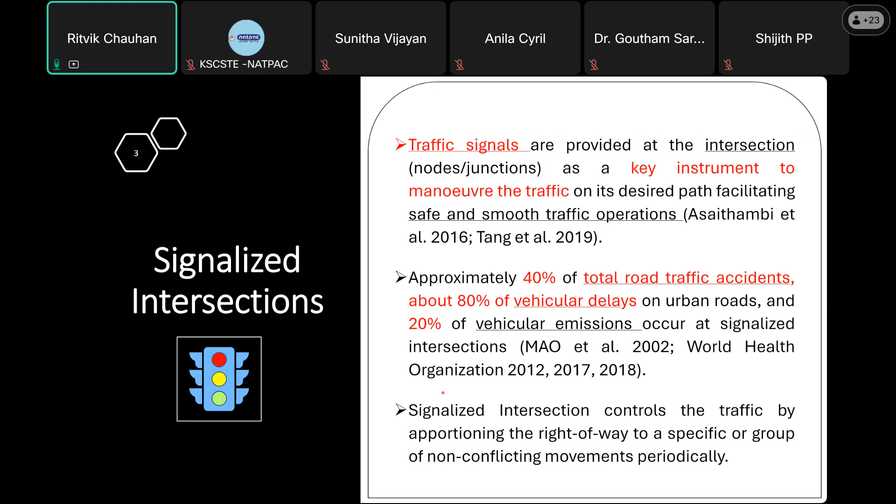However, globally and even in Indian records, a significant number of road accidents have been observed. But why is it so? Even though road control parameters are observed, the main reasons have been found to be high speeding, red light violations, and mostly rear end collisions occurring because of vehicles stationary at the signalized intersection. We generally observe 3 phases at signalized intersections, and their functions are pretty much clear.

Red phase, the vehicle should stop. Green phase, the vehicle has the right of way, or that specific approach has the right of way and is allowed to go. And the amber phase, that succeeds the green phase and precedes the red phase, is to provide a warning to drivers that an imminent red phase is coming. Please decelerate and achieve a stop, or if you are already at the stop line, you may continue and clear away from the intersection.

However, in India, it is generally observed that to avoid additional delay, drivers often tend to cross even during the amber phase. As observed in most developed countries, the general rule followed is go at green - meaning if it is green, then only the drivers go. But over here, we observe stop at red - meaning as long as it is red, only then do drivers tend to stop. If it is not red, drivers take that as permission to cross the road.

Because of this, even during the amber phase, drivers continue to cross the stop line until it turns red. What are the results of this?

This creates a scenario where, even as we can see, if the red light has just turned on, whatever vehicle had crossed the stop line is occupying the intersection width. Because of this, the next approach that is supposed to receive the green phase is not able to traverse through the intersection. So coming back to our amber phase, it serves as a buffer zone.

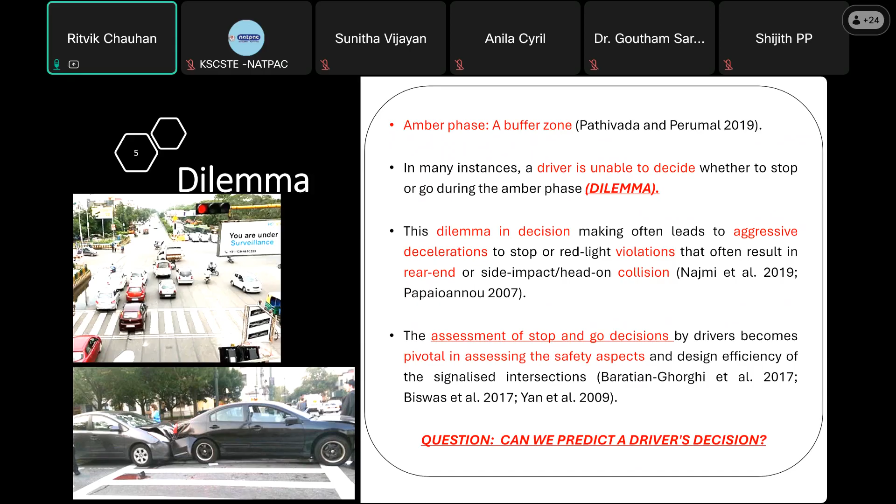So the dilemma zone mainly occurs in the upstream region. Let's say at this signalized intersection, this red line I'm drawing is the stop line, and this is the direction of the traffic. So the dilemma zone will potentially occur in the upstream zone. Similarly, for the opposite stream, it can be on the other side.

If we are able to accurately identify this potential dilemma zone that we are observing, we can provide some means of indication to the drivers that this is a potential dilemma zone. If there is an amber phase, it's better that you decelerate rather than ending up in harsh or aggressive deceleration conditions, or red light violation conditions.

Over the studies, it was observed in 1960 that there are two types of dilemma zone.

The first type of dilemma zone is based on vehicle characteristics, or physical and operational characteristics. That means with the speed the vehicle is moving at, it will neither be able to stop before the stop line, nor will it be able to completely cross the intersection safely in the given amount of time. So if it can't stop before the stop line, nor cross the intersection, it will end up in the region of the intersection. That's what we call type 1 dilemma zone.

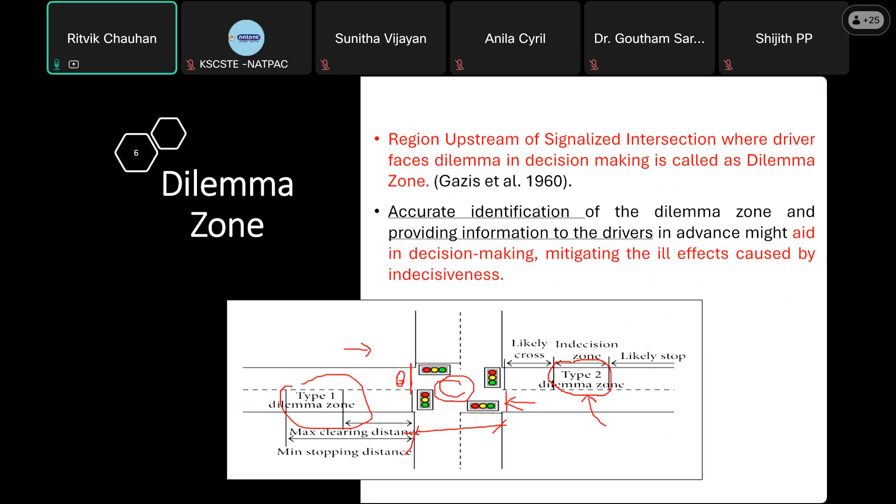So how do we measure type 1 dilemma? Since it's based on vehicle characteristics, we consider that if a vehicle is arriving from this point, it needs a certain point of clearance. That means the vehicle should cross its particular distance to the stop line along with its width, such that not just the front part but even the rear bumper should clear the intersection. So whether the vehicle has potential clearance distance within the available time before red turns on, or else from its position, if it starts decelerating at a normal rate, will it be able to stop before the stop line or not—that's what we see.

So whether it will be able to clear and cross safely, or whether it will be able to stop before the stop line—if neither is able to clear nor able to stop, that region we call the dilemma zone. There is another option: if the driver has an opportunity to either safely cross the intersection or safely stop, we call that the option zone.

However, in India, among multiple studies, it has been found that the option zone rarely occurs. But if we want to provide an option zone, it's very easy. The theory states that we need to calculate the stopping distance, that is braking distance, and the crossing distance, in which width of the intersection, length of the vehicle, time available before red starts, and reaction time are considered.

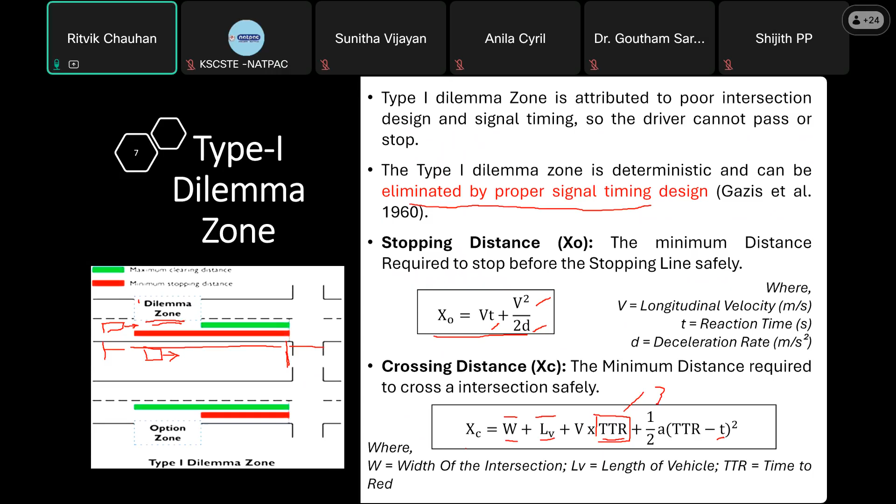So that is the limit of type 1 dilemma zone. That means type 1 dilemma zone cannot be properly eliminated in Indian conditions. If it needs to be eliminated, it has to be followed by proper traffic rule adherence by society. Second is type 2 dilemma zone.

Type 2 dilemma zone, since it's a decision of the driver, considers multiple parameters such as what is the vehicle speed at the start of the amber phase, how far is the vehicle from the stop line, and what type of vehicle the driver is driving. These are the three main parameters used in earlier studies and most studies. However, multiple studies have found that in addition to these three, there are many more significant parameters related to the vehicle.

Vehicle characteristics, signal operation characteristics, field geometry or environmental characteristics, driver parameters, and traffic conditions - studies have been carried out for different traffic conditions using different methods. Since these many parameters have been found significant, that brings a probabilistic nature to the type 2 dilemma zone. So where type 1 was static, type 2 is stated to be dynamic or probabilistic in nature.

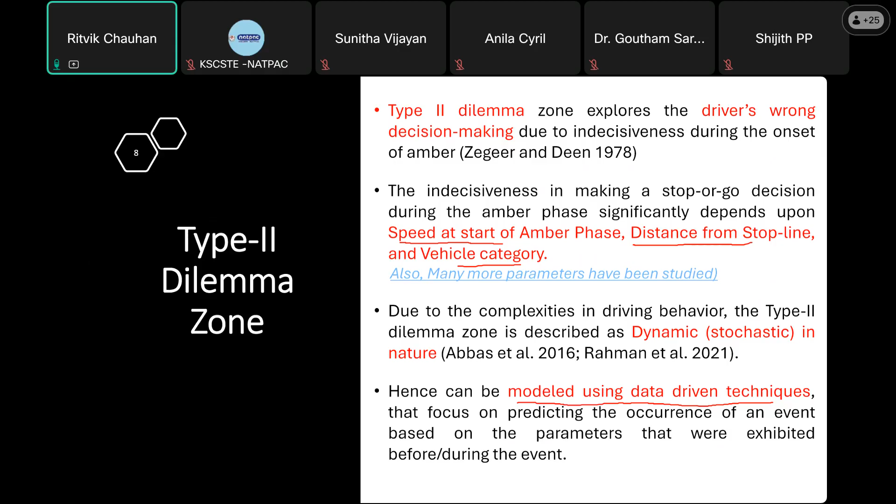Since it is probabilistic, studies have been carried out on data-driven techniques to calculate the potential probability of a vehicle opting to stop or cross considering its different parameters. Since the decision is binary, whether the vehicle should cross or stop, binary logistic regression has most widely been used, where we consider multiple parameters as independent parameters, and the dependent parameter is the decision to stop or cross.

Based on this utility equation, we can find out the probability of passing or probability of stopping. It depends - if you are modeling for crossing, you get P of passing based on the equation, and 1 minus probability of passing gives you probability of stopping.

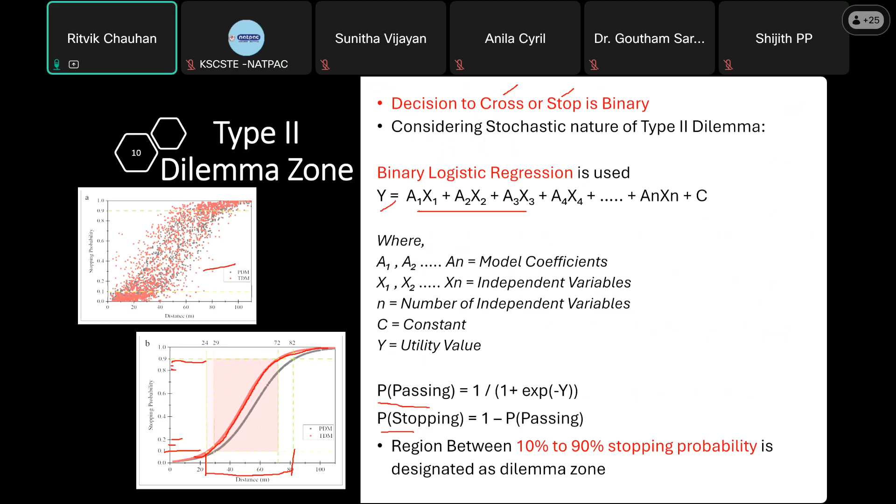Whatever this region corresponds to in distance is said to be the dilemma zone, where indecision or delay in decision making occurs. Subsequently, as we saw for type 1 dilemma zone, considering an average speed or the speed limit of the intersection, the region where a vehicle arriving will not be able to cross or stop will be under dilemma. This is the visualization.

Some studies have also gone with temporal dilemma zone - that means between 2.5 seconds to 5.5 seconds before time to red is where the dilemma in decision making is often observed. But if we want to calculate temporal based dilemma zone, there should be an indication to the driver of the time limit or green time available.

We have display counters, countdown timers at signalized intersections. If those are available, based on values from them, it has been found that 2.5 seconds to 5.5 seconds is an acceptable region where the dilemma will occur.

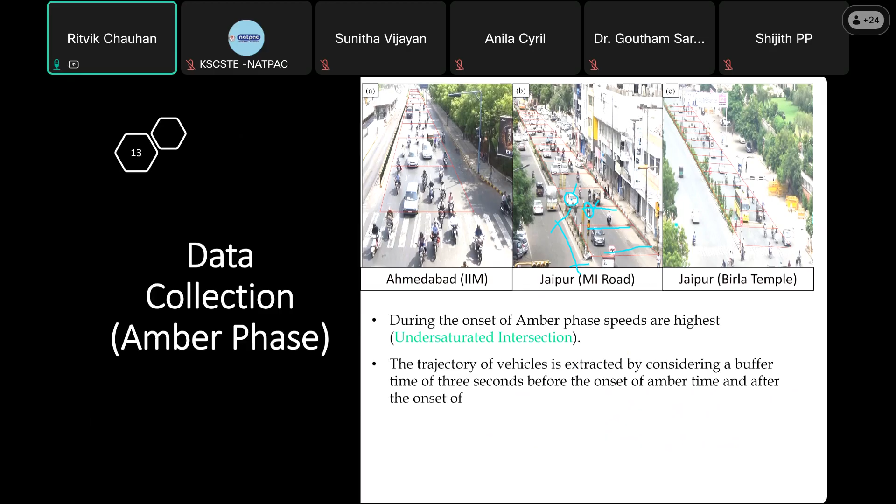These are the main parameters found significant from earlier studies. If you have the study location data, you can consider additional parameters, such as whether the type of intersection plays a significant role as a categorical variable, or whether the approach road width or number of lanes is significant.

Another consideration is the cycle length - if drivers are acquainted with the signal intersection, they know the signal cycle length and the delay it might cause. So whether the signal cycle, amber duration, or green duration is significant are multiple parameters you can add to your analysis for type 2 dilemma zone.

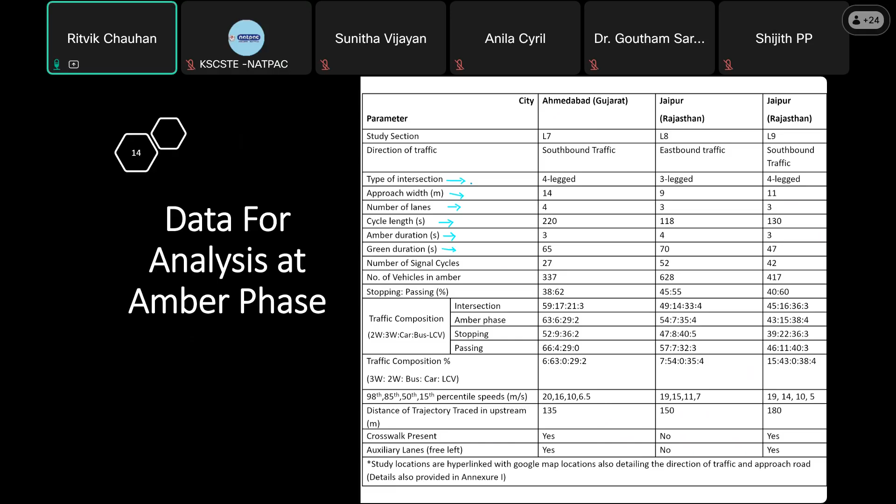In our study, we considered multiple parameters and developed two models. A simple model that only considered distance from stop line, longitudinal speed, vehicle type, and the lane number in which the vehicle was moving - though vehicle type is not specified in this table.

The second model considered all the parameters shown in this table, just to check whether considering more parameters yields better results. Of course, more data-driven techniques will yield better results, but that depends on whether you can acquire this data. Trajectory data proves its advantage here, since you can extract all these parameters.

This includes the potential location of the vehicle, its lateral location, which lane it's moving in, whether it's undergoing lateral movement, the signal cycle length, whether an auxiliary lane was present, and the acceleration of the vehicle.

Based on that, we considered a simple model using only 4 parameters: speed, distance, vehicle type, and lane number. On external validation using an additional study location's data, we found an accuracy of 70%. There have been other studies also that have achieved some accuracy.

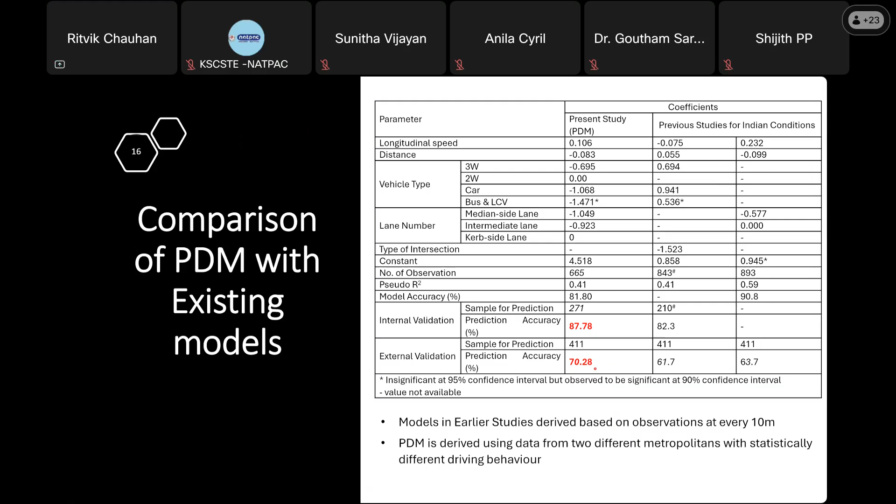Currently, studies in India have achieved 70.28% accuracy in predicting whether the driver will stop or not. If we add additional parameters - all the parameters - we get accuracy of 79 or almost 80% on external validation. But if the model is used for the same intersection it was developed on, we get 90% accuracy, which is an acceptable value.

With that, we are sure that with 90% accuracy, we can predict whether the driver will stop or go.

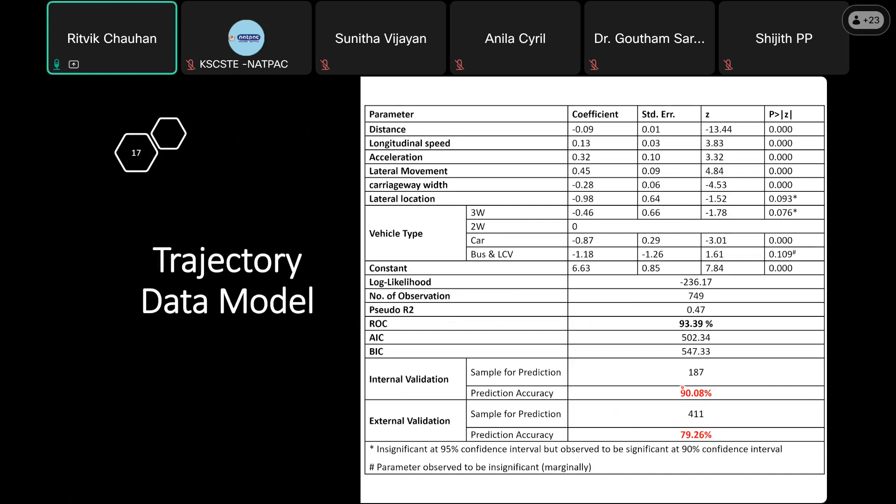Where the model helps is that regression-based models, since they give us coefficients and parameters, help us in evaluating different policies - what if we increase the speed limit, or what if the overall average speed of traffic increases, or what if the vehicle is found to be accelerating at the intersection?

If there's lateral movement - let's say motorized two-wheelers undergo more lateral movement, whether vehicles are shifting towards the median or laterally shifting on the road, or if the vehicle size is increasing - based on that, how does the dilemma zone shift away from or near the signalized intersection?

This can be studied if you have a regression-based equation, and this helps us in pinpointing the accurate location where the dilemma might occur to the driver at a particular intersection.

Based on that, if you have type 1 or type 2 dilemma zone marked, such markings are provided at intersections to guide the driver that this is a dilemma zone, please make your decision before you cross this region. This might be the safe limit, upper or lower boundary, where you might be able to safely slow down or cross. If you're after this zone, cross as soon as it turns amber. If you're before this line, please stop. And if you're in this region, the most desired option should be to stop so you can achieve a safer crossing rather than a red light violation.

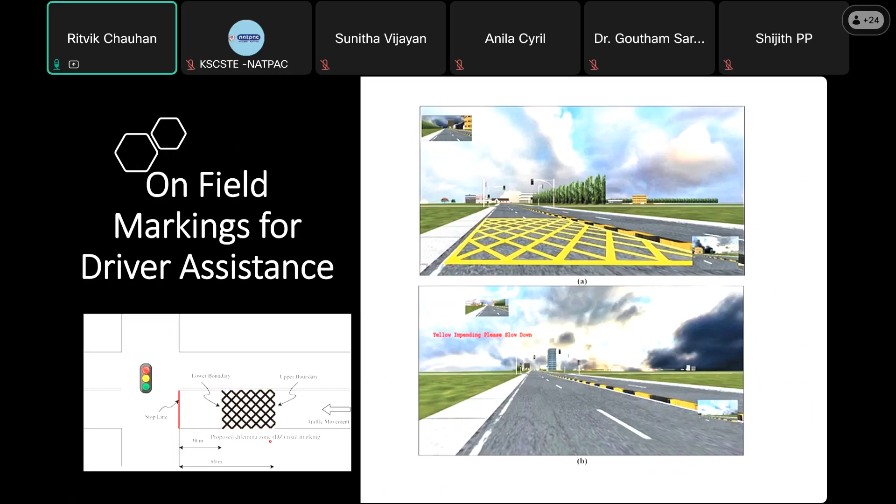Now the next aspect is whether, even after providing these means, the driver ends up making a wrong decision. What might be the potential options? First, he can decelerate very hard. If he decelerates very hard, he ends up with a rear end collision. And because of that collision, how do we measure that?

So we have different proactive safety assessments. If we rely on accident data, the problem is: at one location, what was the potential reason for accidents, and were the number of accidents sufficient to justify safety improvement measures properly - it's difficult. Hence in this present study, we went with proactive safety assessment.

We used surrogate measures to detect the conflicts, and based on the conflict we found out what are the hotspots. We tried to model the rear end conflicts as to what is the probability that, with given parameters, a particular vehicle will end up in a rear end conflict. And if we just change simple traffic operation parameters, can we reduce the probability of rear end conflict for a particular vehicle? So what is a conflict? I'll briefly go through this.

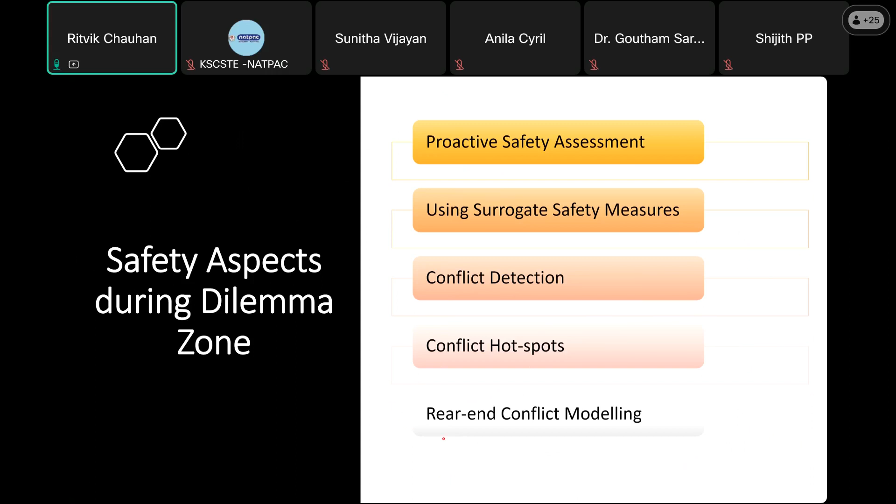If two vehicles are moving, provided that the follower is traveling at higher speed than the leader, then at a certain point there is a potential that they will occur in a rear end conflict. But if during that moment the driver perceives it and decelerates, changing the trajectory, then the conflict point is avoided. So this surrogate safety measure considers that a potential collision will occur. Another theory is that every accident was a conflict, but every conflict is not an accident. So if you can remove a conflict, you can entirely remove an accident. That is the basic essence of what we go with in surrogate safety assessment.

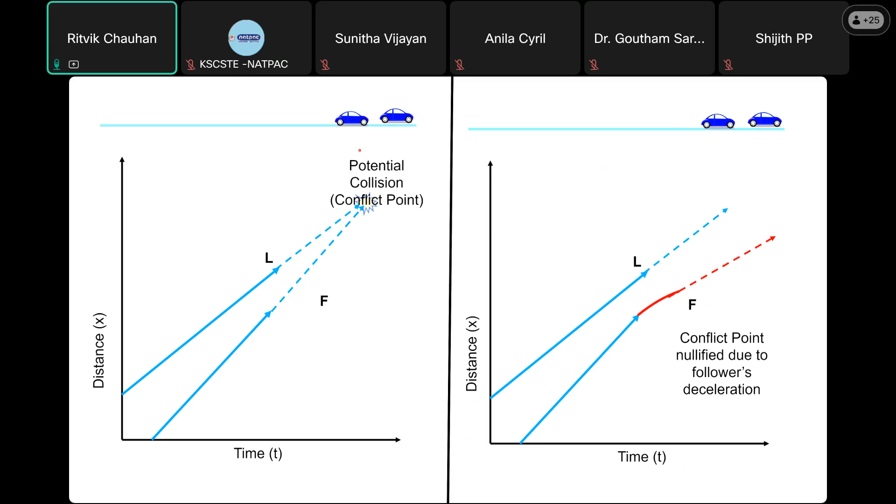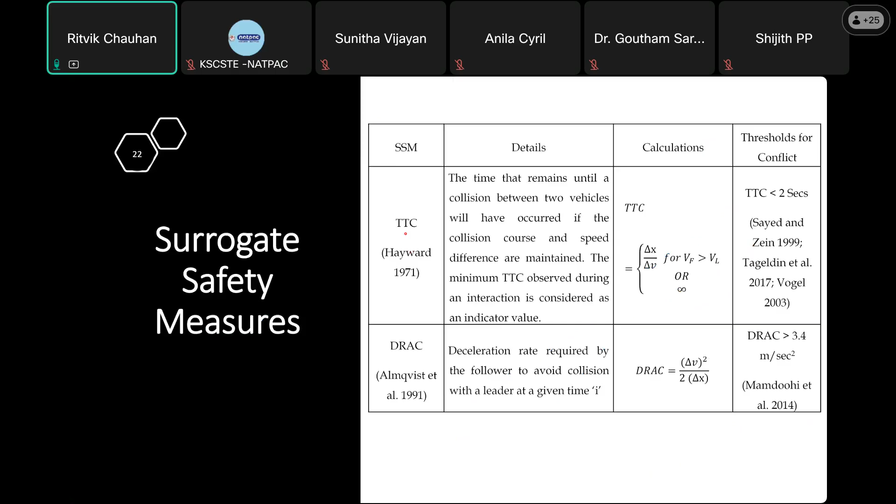We use two surrogate safety measures: time to collision and deceleration rate to avoid collision. Basically, at what rate should the vehicle decelerate to avoid the collision? And if the vehicle continues to move at the same speed, after how much time will it collide with another vehicle? Based on that, we found out the potential leader, follower, or vehicles interacting with each other, their relative speed, the delta x and delta v, and based on that, whether they were in conflict or not.

Since these bigger vehicles are either more cautious, or require more deceleration, or have lower maneuverability, their decision might be made much earlier before the signal stop line. Whereas two-wheelers, because of their high maneuverability and advantage due to road size, were observed to be more aggressive and decelerate at a higher rate near the stop line, because of which the potential of rear-end conflicts was significantly higher near the curb side, where two-wheeler vehicles were found to be more.

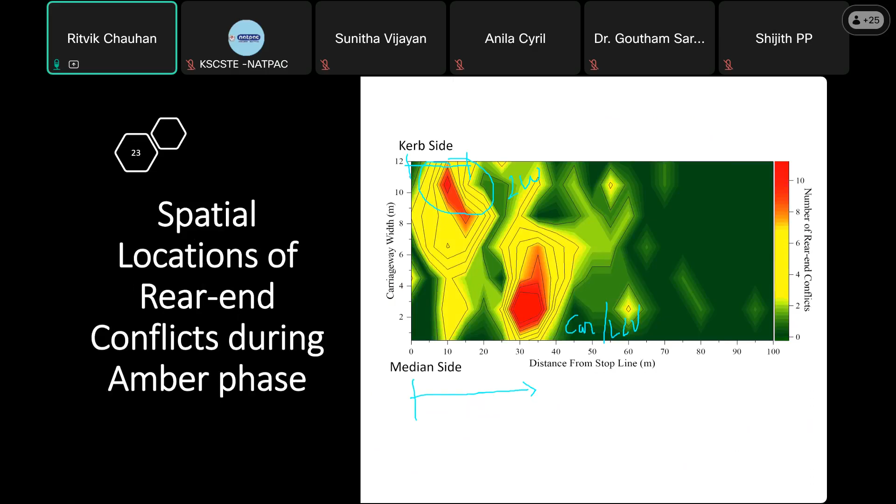Now for that conflict, what will be the probability, and what will be the number of rear-end conflicts? If we can predict, based on operating conditions, the number of rear-end conflicts, it has practical applications. We can determine the potential hotspots for our current operation policy, and whether a change in policy results in a change in the number of conflicts. Rear-end conflict probability provides advanced driver decision-making assistance, and it works on a microscopic level.

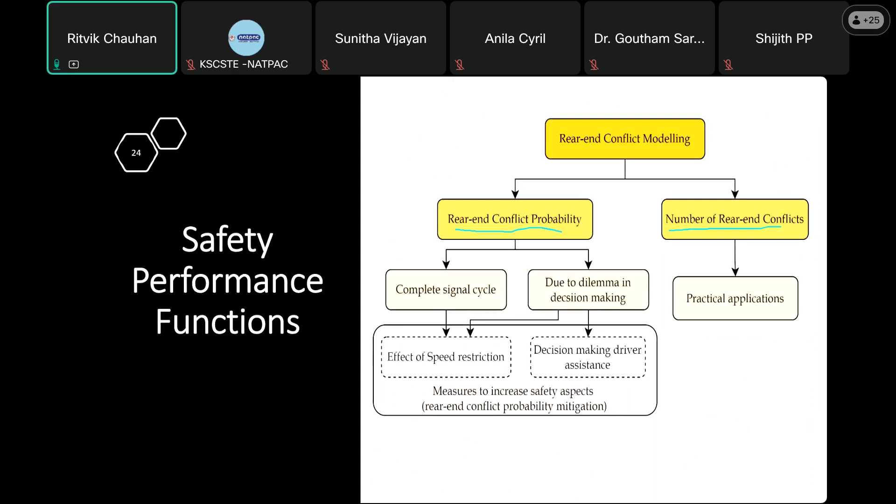Since our decision is binary, to stop or to pass, the conflict is also a binary variable based on the different independent parameters we considered. Whether it was a conflict or not between two vehicle classes can also be binary, and hence we also use binary logistic regression. Now in this, we use multiple parameters.

We use the longitudinal speed of the leading vehicle and the following vehicle, what was the follower location, and was there any lateral overlap between the two vehicles? Let's say this is one vehicle and this is another vehicle - a particular region would be the lateral overlap. And because we don't have lane discipline, this vehicle can deviate to the right side and also overtake. Hence we also consider what was the lateral overlap and whether it has significance.

What was the follower's lateral speed while moving? If it is moving laterally from the start, that means it can easily overtake, or it can negate the lateral overlap. What was the leading vehicle class and follower vehicle class? In addition, since the data was already extracted, we had the leader's decision to pass, and what was the leader and follower's decision. Based on that, using different surrogate safety measures and at different thresholds, we tried to model what will be the conflict probability.

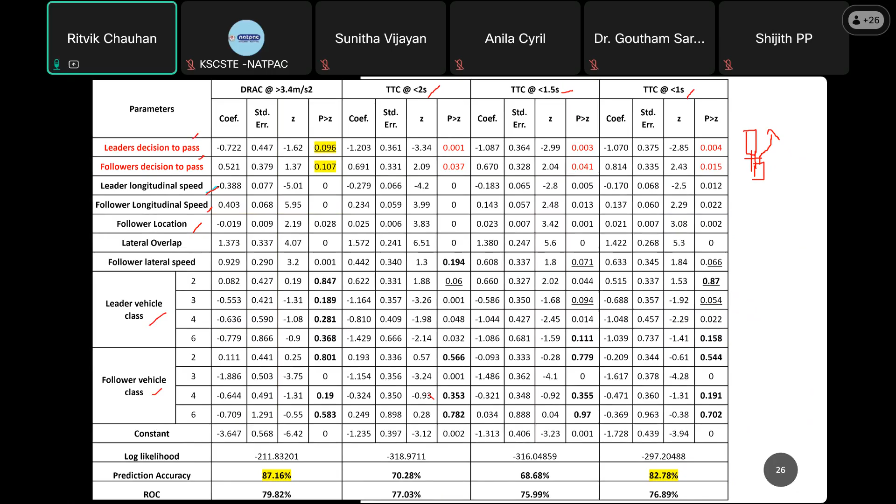And as we can see in the red fonts over here, even the decision of the vehicles was found to be significant among other parameters. That means...

Considering the advancement of technology, let's assume a simple case scenario where an intelligent transportation system exists with vehicle-to-vehicle communication at this intersection. If we can inform a following vehicle that the leading vehicle has decided to stop or decided to pass - please take your decision, or base your decision on that. The leading vehicle is stopping, please stop. Does it change the decision or not?

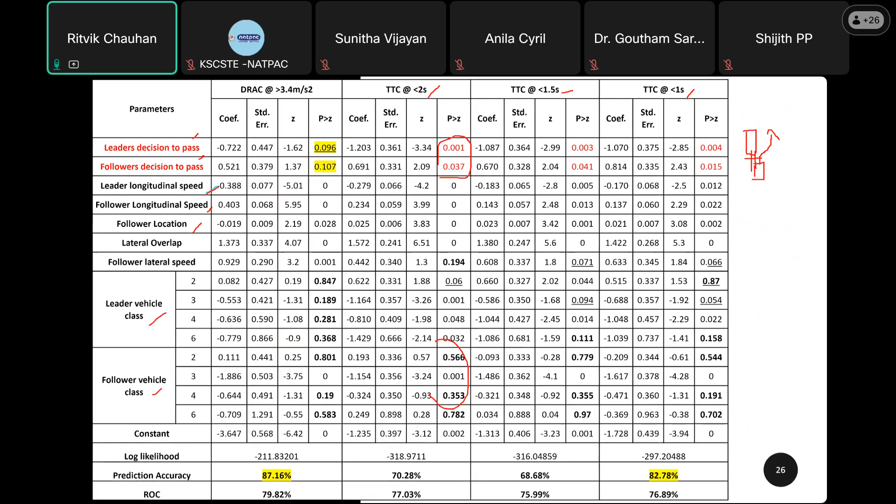Now, if using this model we communicate a particular leader vehicle's decision - whether it will stop or pass - to the follower, and the follower changes its decision based on the leader's decision, we found that for all vehicles there was an 11% reduction in the rear-end conflict probability, meaning the probability that they would be in a rear-end conflict was reduced by almost 11%.

This is based only on the following vehicle adhering to the suggested decision. And if the leader is given a decision that it cannot safely cross and should stop, and the leader is stopping, and that decision is also conveyed to the following vehicle, the reduction in rear-end conflict probability was observed to be 15.74%.

Secondly, let's come to real time now. If we want to provide such solutions to drivers - a driver decision assistance system during a dilemma - we need real-time decision prediction, and nowadays we achieve that using machine learning techniques. So for the same dataset, we created 4 models. We wanted to check - in model B and model D we only used minimal parameters of speed, distance, and vehicle type.

Model B and model D. In model A and model C, we used all the parameters. In the first 2 models, we split them 70 to 30%. And in the last 2 models, we used 3 study section data for model development and one study section, the 4th, for model validation.

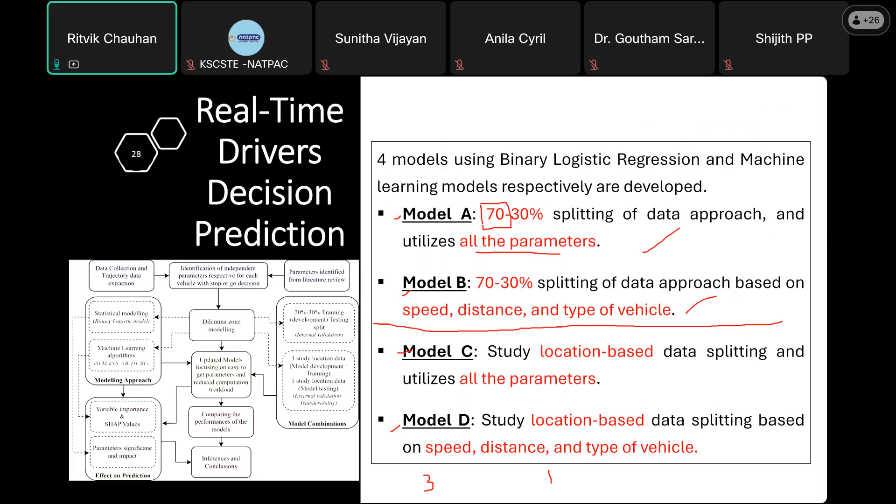Based on that, we used multiple regression machine learning models. Mostly 5 models were used, but the best results were achieved from SVM, support vector machine, decision tree, and random forest. Random forest yielded the best results for the 70-30 split, or the models that had all the parameters. But with only a smaller number of parameters, we found that the decision tree also worked very well, for both internal and external validation, and the results were almost similar.

That means, irrespective of whether you go with internal or external validation, models with fewer parameters, constituting data from multiple study locations so that all the intricacies and complex relationships between parameters are captured, can still be developed as decision tree models for accurate prediction of the driver's decision, whether the driver will stop or pass. Where will this model be useful?

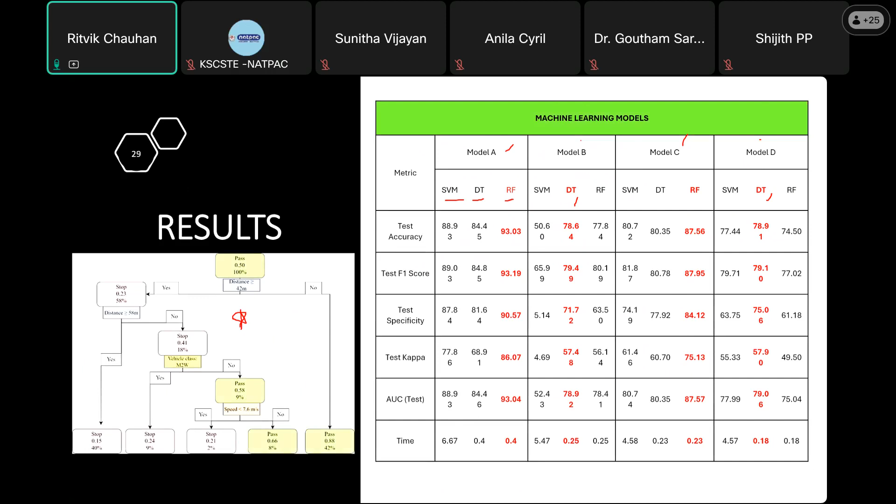Okay, I'll come back to this result. Unlike the regression equation we studied for binary logistic regression, which provides coefficients to check which parameter significantly affects the outcome and what the change in magnitude in the dilemma would be, in machine learning we are restricted. We do not get the potential effect directly; we only get parameter importance identified using Shapley value or variable importance.

This is the Shapley additive explanations. It shows, for whatever independent parameters you used, let's say distance, speed, average acceleration, lateral speed, or just 3 parameters like distance, speed, and vehicle type, what their effect was on correctly predicting stopping or passing.

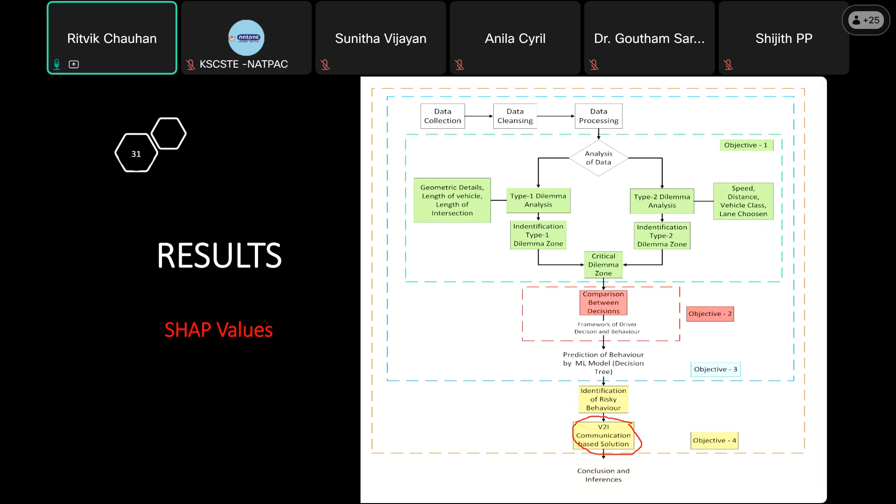So remember the plots I showed you earlier, I said I'd come back to them. Currently, we are working on developing a framework that takes advantage of intelligent transportation systems, assuming vehicle-to-infrastructure communication exists. If this exists, can we provide certain means to alert the driver and guide them to take a safe decision, one that provides safe maneuverability during the dilemma at the intersection?

So since we have identified type 1 dilemma zone and type 2 dilemma zone, additionally, we found the overlapping area where both type 1 and type 2 dilemma zones occur. We have termed this, not as an official term but for this presentation and study, the critical dilemma zone.

That means whatever decision assistance system is to be provided, the priority is that at least in this zone, the decision should be communicated to the driver. As to how we do that...

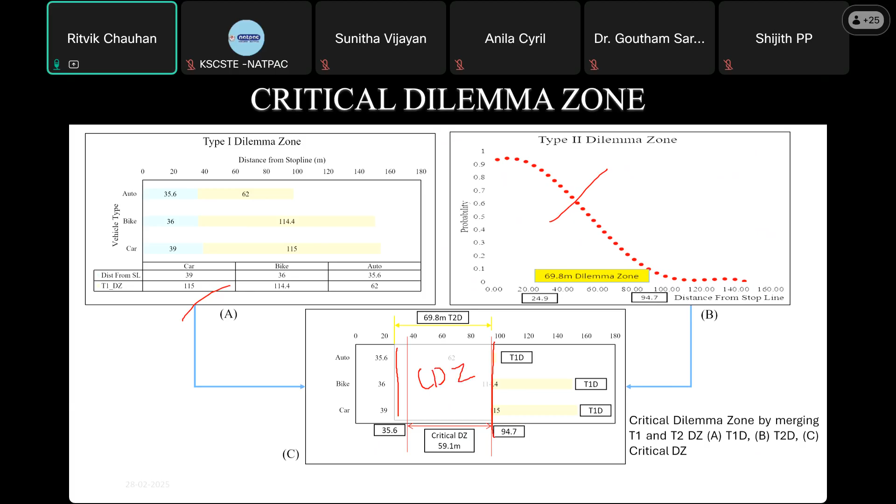Based on the regression equation at higher accuracy, say 90% or 85%, or assuming the present highest accuracy is achieved, we can predict what the driver's decision will be.

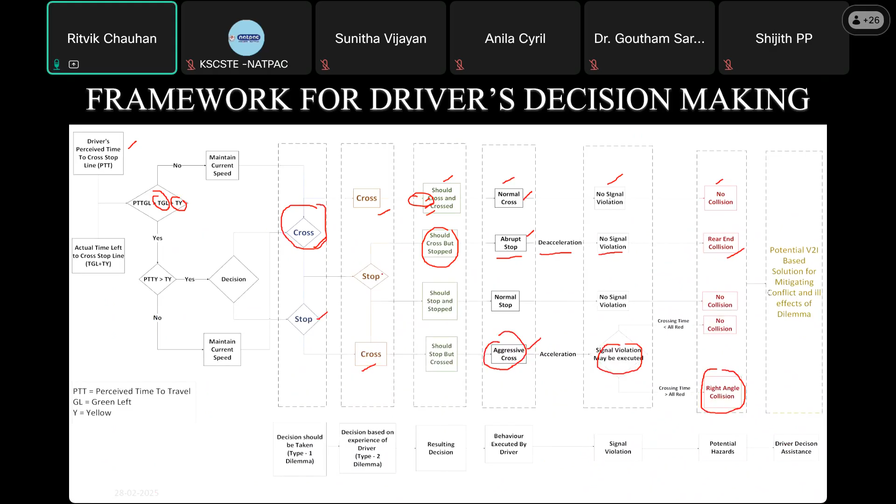Here we have whether he should cross or stop, rather than leaving it to the driver's decision. That can be provided using simple means such as a blinker on the dashboard or a simple chime, as studies in advanced developed countries have already been following. Just a simple green indicator meaning please accelerate or continue going, or a red indicator meaning you should stop, so that the driver can traverse the intersection safely without facing the dilemma.

So based on this, I'll conclude my talk for today. We have identified that, based on studies conducted in India for our particular mixed lane traffic conditions, indecision in drivers during the amber phase can lead to dangerous situations. But accurate prediction of the dilemma zone or the driver's decision is possible. If we use data-driven techniques with a significant amount of data encompassing driving behavior, operating conditions, and traffic behavior from multiple locations, a model can be developed that is able to predict the driver's decision.

That helps us identify the potential dilemma zones. If we go for lane marking, it can be a static safety measure for driver assistance. If we go for vehicle-to-infrastructure communication, that could be a dynamic driver assistance system. These methods will help in enhancing safety.

Lastly, since at the start I said we observe the 'stop at red' policy, if only we could all adhere to a 'go at green' policy instead—meaning if it is green, then only go or accelerate, and if it is anything else, the first instinct should be to decelerate and stop—that would help us avoid these conflicting scenarios. Thank you very much.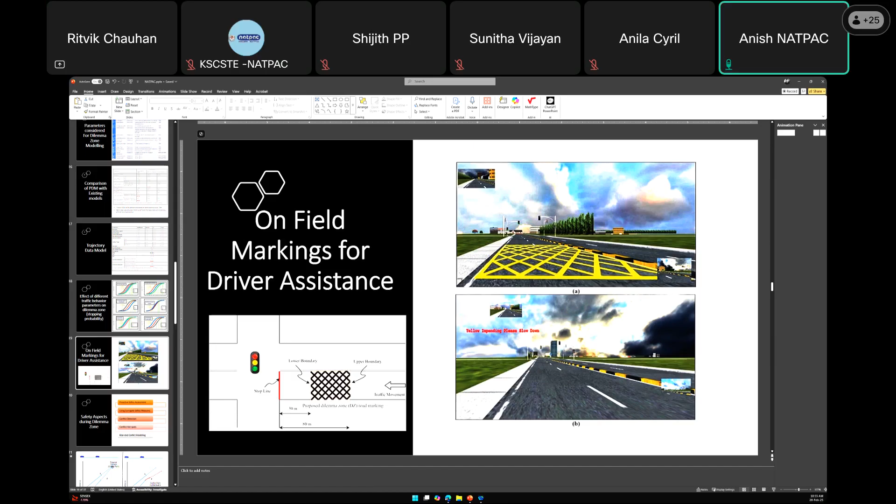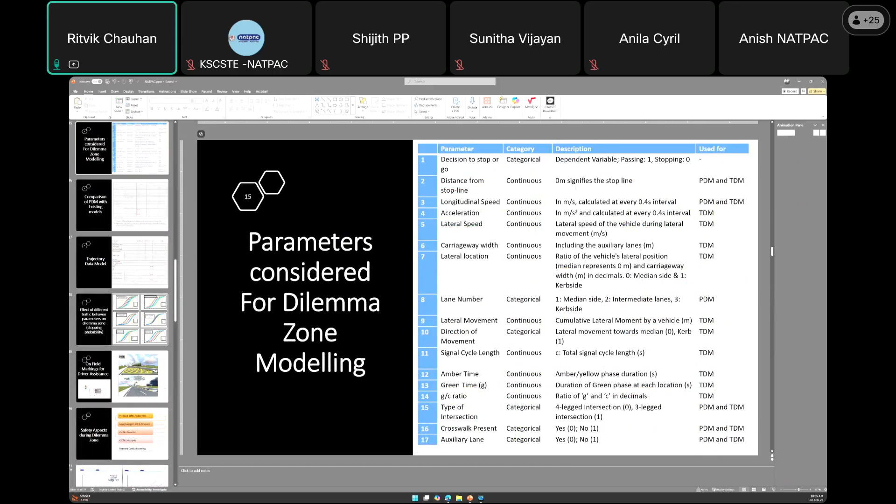Yes sir, that will add to the complexity. I think in the study locations, two locations—A and C—had free left turn with proper auxiliary lane design, whereas B did not have free left turn. There was also a crosswalk with pedestrian movements occurring, but at present we did not study the effect of pedestrians specifically. We studied the effect of crosswalk presence as a categorical variable of 1 and 0, but whether the volume of pedestrians moving through would affect it has not been studied.

Okay, and you were also mentioning the countdown timer. Yes sir—if we don't give the countdown timer, will it have any significance? Because only knowing the time left, people are accelerating at the dilemma zone. Countdown timers were provided with the hope that they would warn drivers that red is impending and to start decelerating.

But a study from CRRI, I think by Satish Chandra sir and principal scientist Velmurugan sir, found the result to be totally opposite—almost the majority of drivers were observed to accelerate during the end of phase or end of the timer. So exactly—whether provision of that would be effective or not for Indian driving conditions has been proven not to be effective; it is in fact resulting in more aggressive driving and increased acceleration at higher speeds.

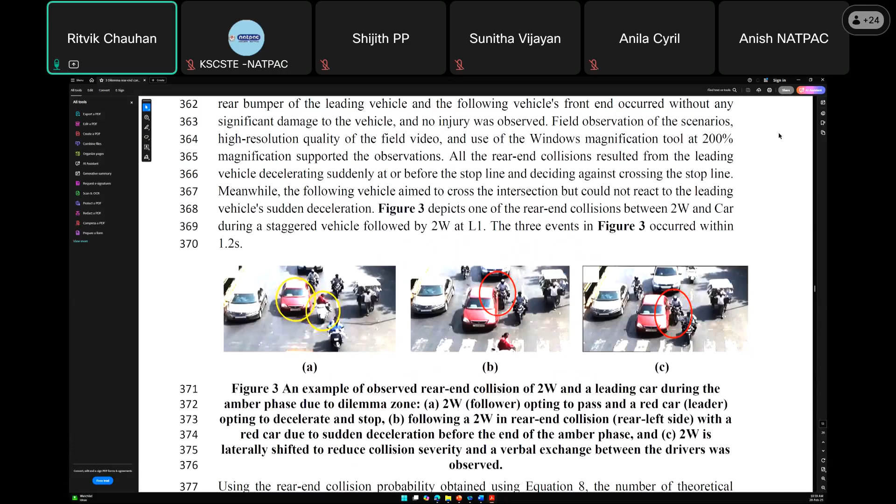There was another study in Surat just recently conducted, in which a two-wheeler ended up colliding into an LCV, the small light commercial vehicle we have, Tata 207, I think, in that. So if the visibility is not there, or because of close vehicle following behavior, that has been an ill effect.

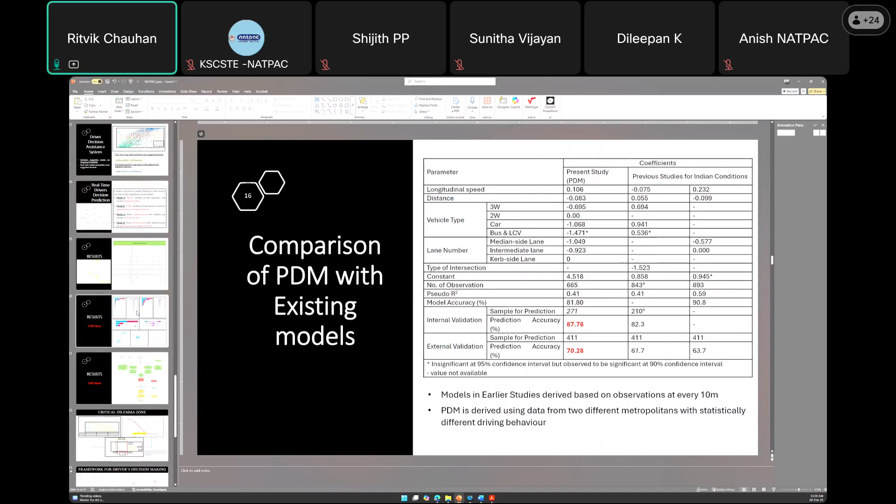However, for Shapley, or in machine learning, the problem is we do not get such coefficients. We only get the impact on the model output, or impact on our decision, or the final prediction. So let's say there are two predictions: blue signifies stopping and red signifies crossing. So what is the impact? I can bring your attention to

this beeswarm plot that you are seeing, the B plot. Shapley additive, what it says is whether the impact on the decision prediction is high or low. That is given by color. Blue color says that the impact is very low. Red color says that the impact is very high. Now, the magnitude of these values specifies by what magnitude will that effect be towards the decision.

If I can plot out, okay, I cannot plot out, but I can share you a simple wording PDF with all the explanations.

Sure, sir. But if I have to repeat, at present, final Y, whatever our decision is, we cannot say what will be the probability or what will be the decision based on this value. We are only able to get what is the effect, or the magnitude of the effect, on correct prediction. Whether it is negative prediction or false prediction or right prediction, and whether the effect of correct prediction is very high or very low, that is only what we are able to get from machine learning. We are not able to get the magnitude or quantification.

So just for checking all three models, which parameter is significantly affecting or not, that is all. So on the three models you mentioned. So support vector machine, decision tree, and random forest. Yeah. Okay.

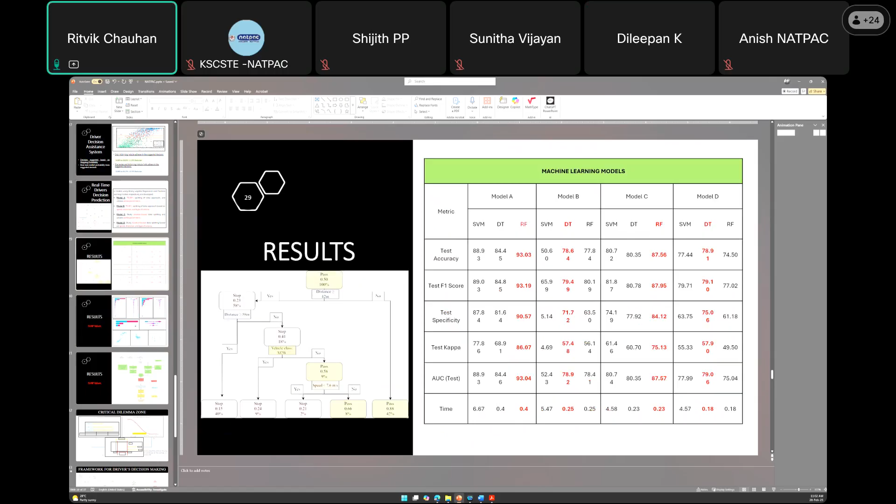In that, the SHAP values are for the random forest model. These are for random forest model. Since we had both the models, decision tree and random forest, as good predictions, in the study we developed a decision tree that helps us for prediction and which parameter is significant, we gave over this.

So if you can see this C plot at the top, we see that crosswalk, amber, auxiliary lane, display timer, G by C ratio, the type of intersection, or the carriageway width had no effect on accurate prediction of my decision in the model. So these parameters we did not rely on or use. Hence, we can also reduce the complexity or computation load on our model.

Understood, sir. Yeah. Thank you, sir. Sure.

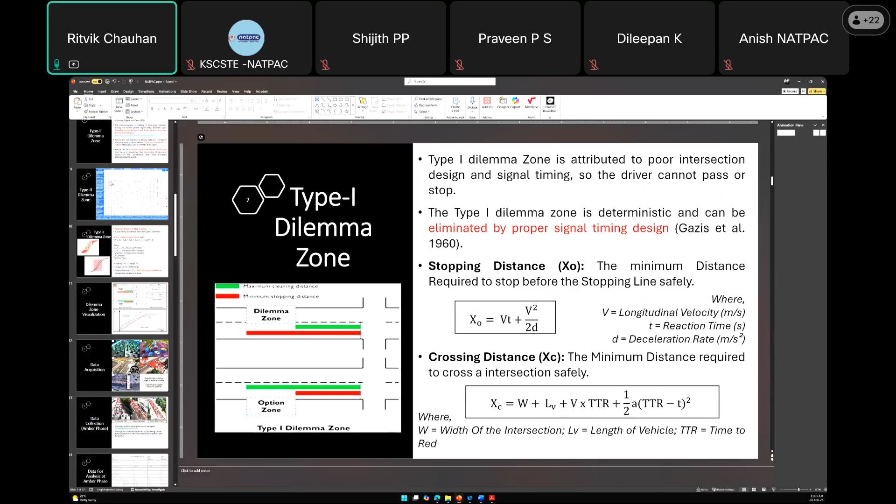So this is what a potential effect of time pressure can look like on our dataset. This is not the actual reason, but if it was, this is where it might show up in our data, sir.

So what was the time of data collection? Was it peak hour or off-peak hour? These two are standing out as outliers, right?

Yes, these study locations were all considered during off-peak hour, because to check the adverse effect of the dilemma zone, we had to consider under-saturated conditions, which are less likely to happen during peak hour. If it's oversaturated or saturated, the dilemma zone is observed to be almost negligible or near the stop line only.

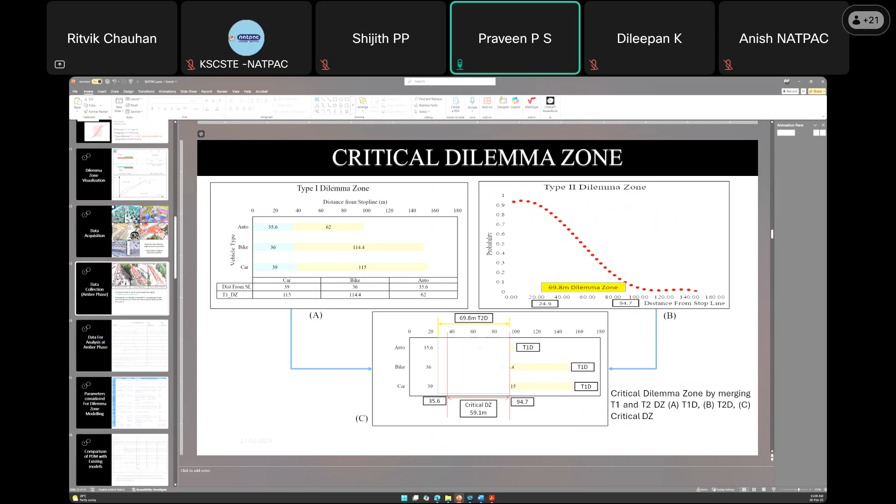So I believe there was queue duration during data collection—was it like, were queued vehicles and through vehicles taken as a common group for the analysis? No, sir. During the red phase, there was queue generation at the intersection.

But during the green phase, the entire queue dissipated completely, plus some additional vehicles arriving from far upstream were able to cross the junction before the green turned red. That means whatever vehicles were arriving from the far upstream area were able to traverse to the intersection at their desired speed also.

And the maximum queue length I have provided in this data section—not provided here, but the maximum queue length observed varied for all the signal cycles. That means the degree of saturation was different, but all were under-saturated, that was for sure.

Okay, just one more question. You mentioned that the signal cycle length is probably one of the factors which might govern the elements. As I've seen in your data collection, the three locations had cycle lengths around 118 seconds, another around 130 seconds, and another around 220 seconds, right? Yes, sir. Signal cycle.

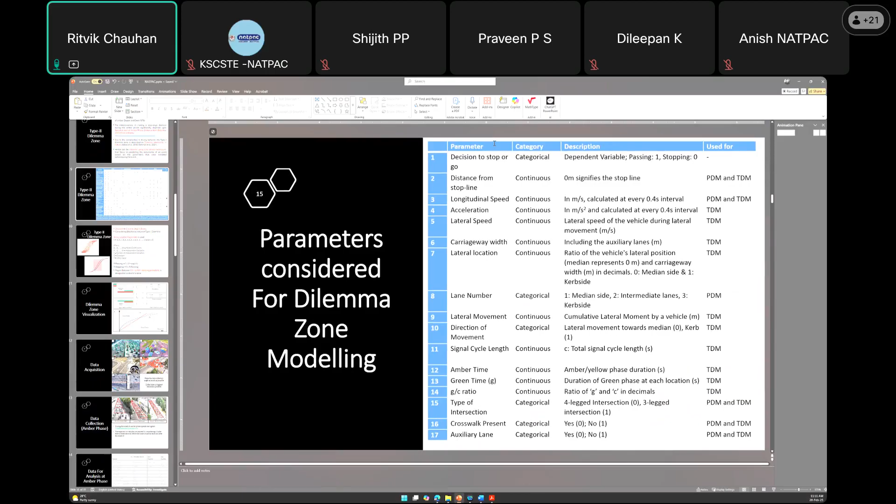If that is part of the modeling, whether it is significant or not, we just considered all the operational parameters, since from the studies we had found out that all the parameters regarding signal operations field, we tried to consider them. In some areas we found them significant, whereas in some locations, as with G/C signal cycle length, their effect is not significant.

Okay, fine. So I believe the data collection time was more or less uniform for all the locations, right? Sir, could you repeat that? Same time of the day that data collection was done, and same month.

All data was collected within 30 days, and annually it was the same time during morning off-peak hour, so around 11 to 12 a.m. Okay, fine, so around 1 hour of data for each of the locations.

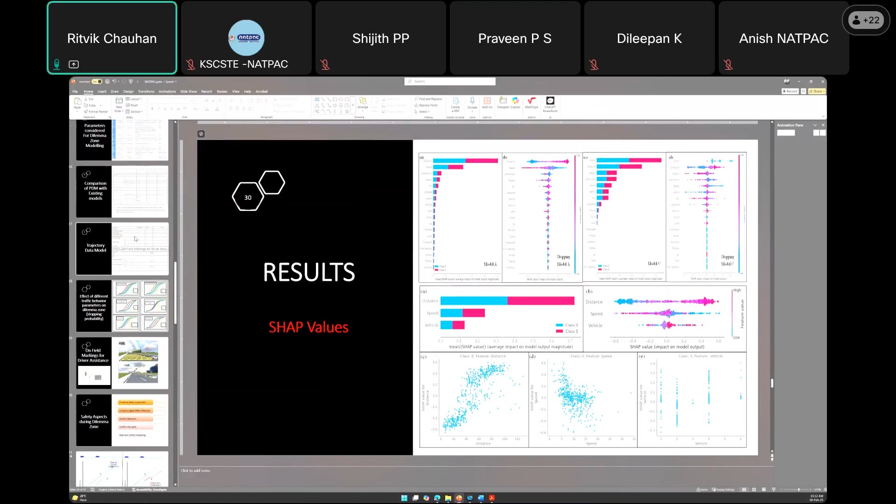1 hour of data for each location, but at that time when I extracted the data, the automated driving extractor was not available, so I had to rely on traffic data extractor software from IIT Delhi, and I had to manually extract all the trajectories. For the amber phase, I only considered - I think the number of cycles I have provided as to how many I selected.

27, 52, and 42 cycles at these study locations. And only amber phase plus minus 3 second or 4 second data was extracted as trajectory data.

Okay, fine. Okay, thank you, that's all. Hello, myself Dr. Anusha from CET, College of Engineering, Trivandrum. Very nice presentation.

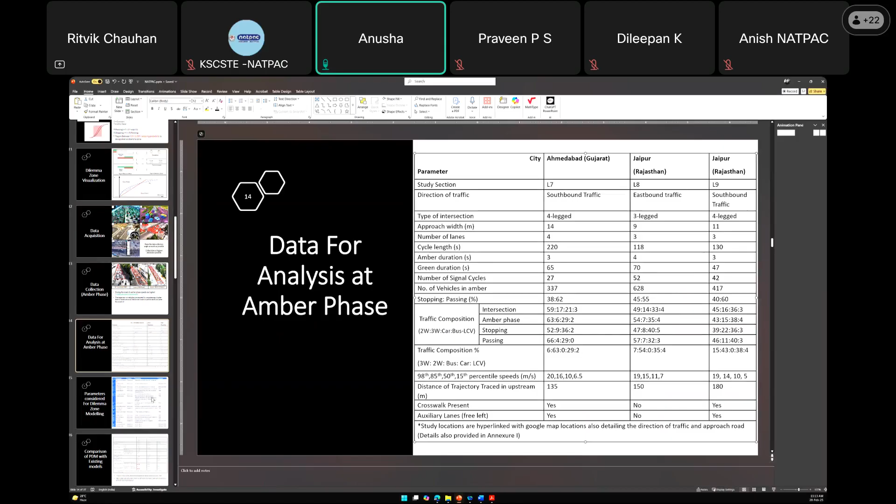Yes, thank you. So my concern was on the driver decision assistance system given - so how was that data collected? How was the communication between the leader and follower, those aspects, taken into account?

No, madam, this is what we are working on, and we are working with an assumption that it exists. Because for that, if we wish to communicate with the driver, we need support from the local authorities so that we can install some modem so that something can be connected, and for that, both the vehicle and the infrastructure need to be modified.

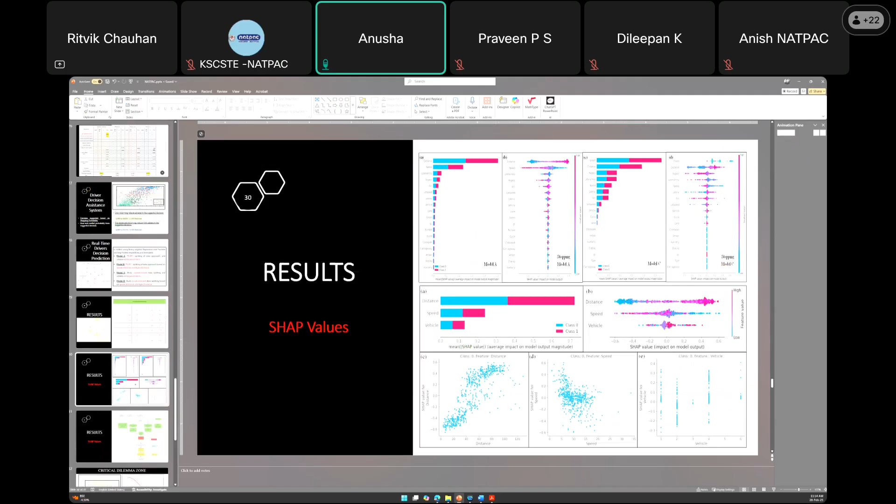We are working on that. You were showing a figure with 15% - some inferences. So was that data from one slide? I don't remember exactly what this was based on, madam - the model that was prepared. So we have the coefficients.

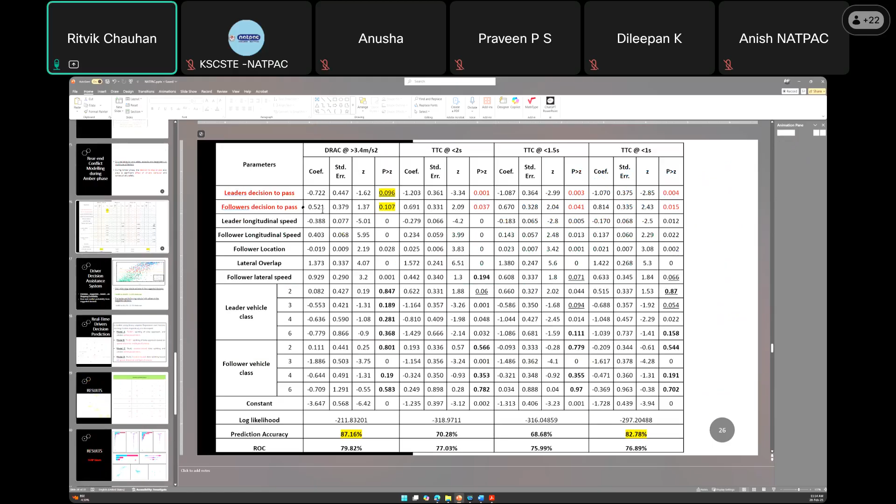So whichever vehicles ended up making the wrong decision, if we manually change their decision to the correct one, we found an 11% or 15% reduction in rear end conflict probability. So basically a sensitivity analysis using the model. Since this exists, we are trying to extend it to a driver assistance system in real time.

Okay, yeah, the data looked very nice and I was thinking about how the data was obtained. Okay, no, I got the concept now. Yeah, statistical analysis shows that this can work, provided that the drivers are communicated.

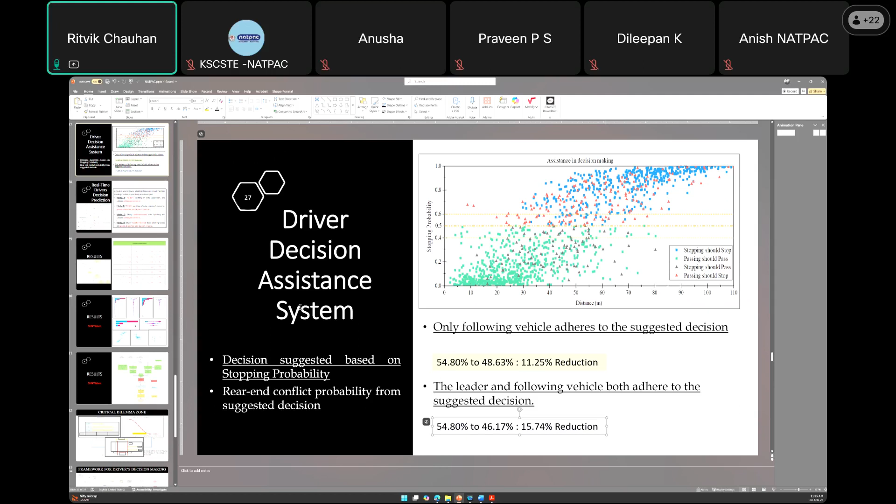But how will we communicate the decision to the driver, and when will it be communicated? This is what we are working on at present - identifying the potential location. We need to find out when the vehicle will be in dilemma, what is the last point when they will not be in dilemma, and at that point, what was the safest decision for them - to go or to stop. We suggest that decision so they are able to cross. This is what we are trying to experiment with now.

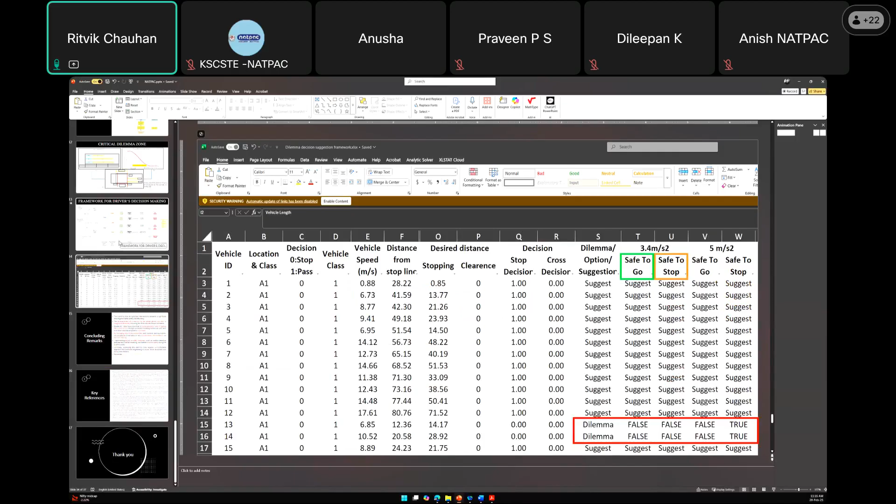But it's entirely based on database, madam, we don't have any infrastructure as of now. Yes, okay, thank you so much. Sure, madam.

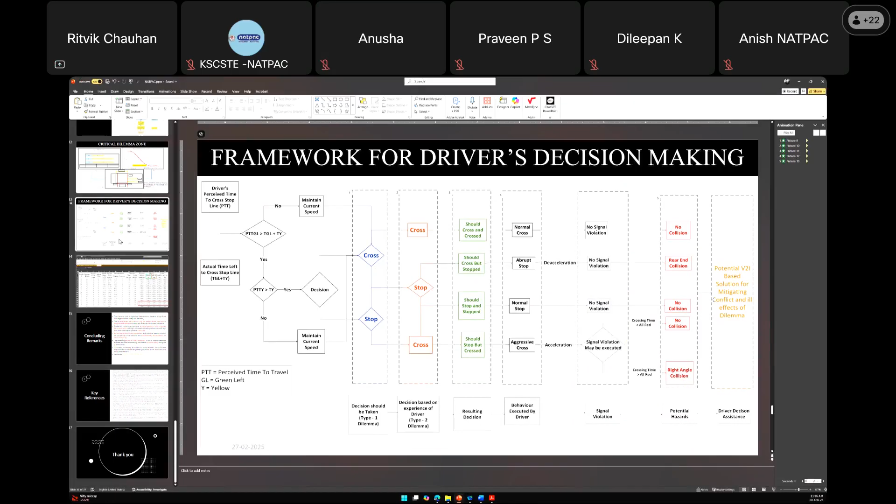Would anyone like to add any comments or ask any further questions on this subject? There is a comment in the chat box.

What are your thoughts on introducing speed breakers? Speed breakers as in the small speed bumps?

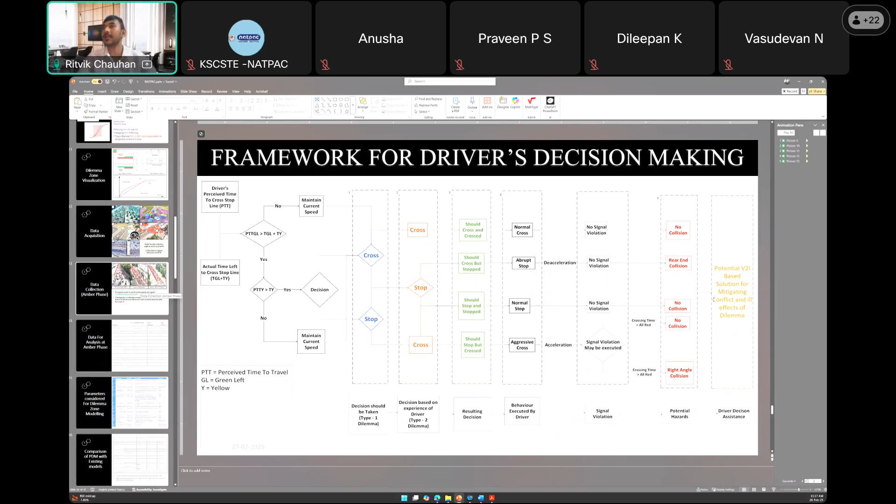So initially they inserted a speed breaker, but that speed breaker was found to be very severely affecting the operational efficiency. So from that speed breaker, they ended up working with speed bumps instead. But since I did not have before or after data, I could not work with it.

But the effect earlier was found to be that the dilemma zone ceased to exist, because the vehicle had to decelerate to almost a standstill condition at the speed breaker, and then accelerate again. Because of this, if the signal was red, most vehicles tended to stop; only people who were aggressive or in a hurry went with traffic rule violation or aggressive acceleration. But the majority of vehicles tended to undertake the decision of stopping. That was the effect of the speed bump observed from field evaluation.

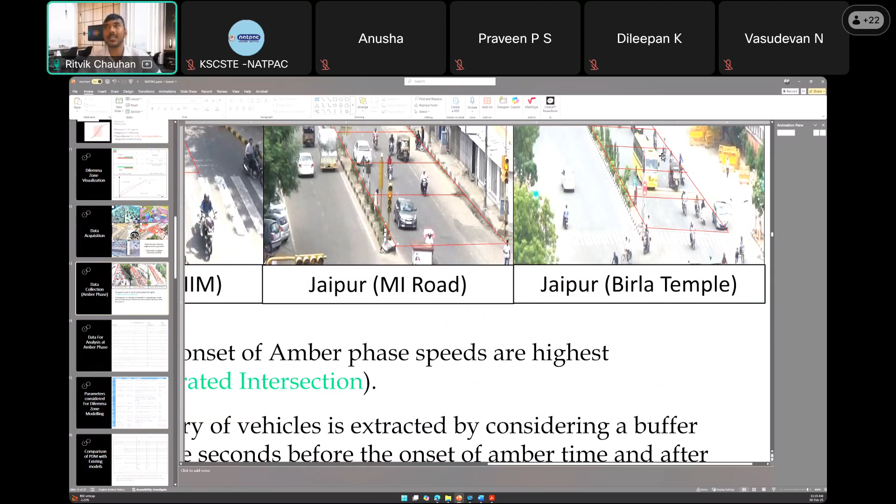What was the condition before? Since I did not know that, this is just my thought - I cannot provide you with concrete evidence. But if you want to see that accident, it is available on YouTube. Just search Jaipur Birla Temple Road accident - if you check, you will see why it needed such a severe measure.

Are there any other questions?